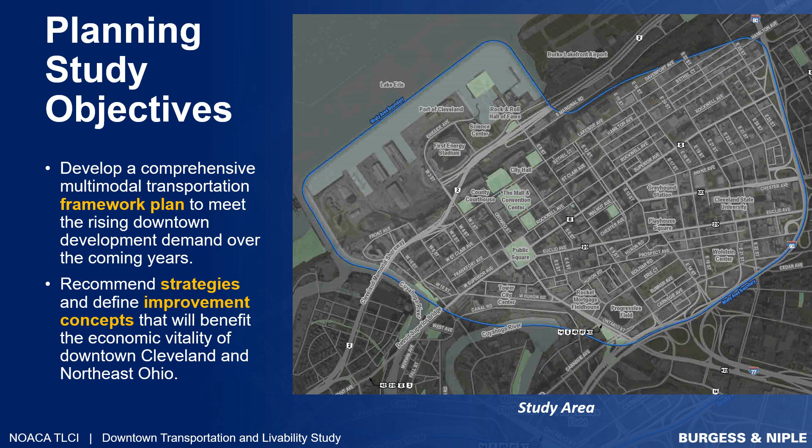This study was sponsored by NOACA, the Northeast Ohio Area-Wide Coordinating Agency, and the study was developed by a consulting team led by Burgess and Niple. A working group helped guide the planning efforts, including staff from the City of Cleveland, the Greater Cleveland Regional Transit Authority, and Downtown Cleveland. The study also included input from a number of key stakeholders and implementation partners, as well as members of the public.

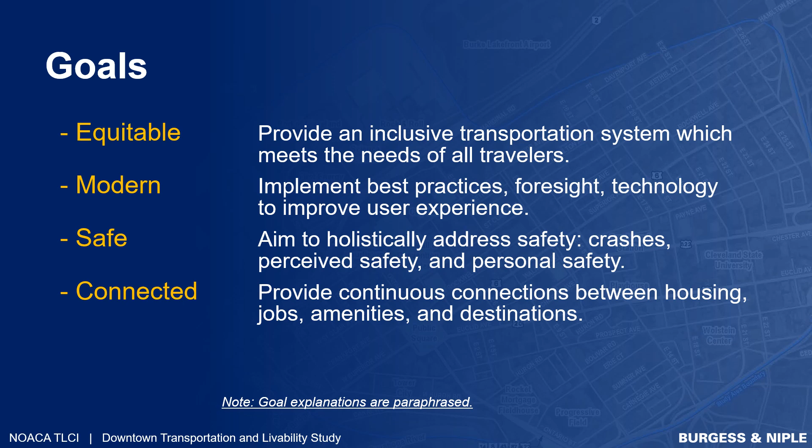When considering where our goals come from, the vision statement says it all. Essentially, descriptors in the vision statement establish the goals for the plan. These goals include equitable, provide an inclusive transportation system which meets the needs of all travelers. Modern, implement best practices, foresight, technology to improve user experience. Safe, aim to holistically address safety, crashes, perceived safety, and personal safety. Connected, provide continuous connections between housing, jobs, amenities, and destinations.

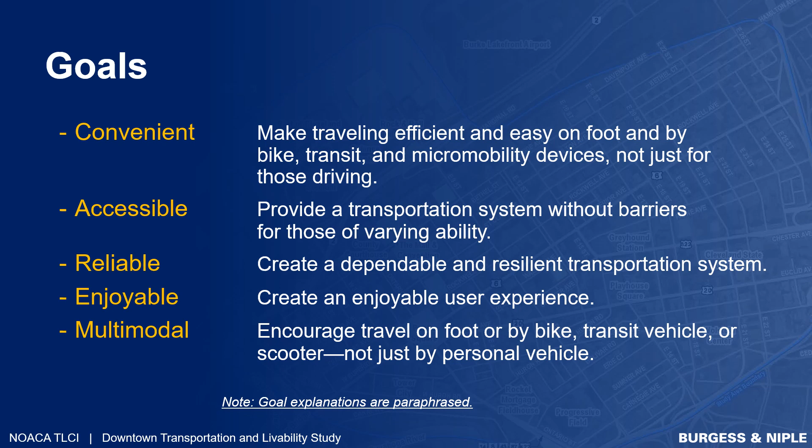Convenient, make traveling efficient and easy on foot and by bike, transit, and micromobility devices, not just for those driving. Accessible, provide a transportation system without barriers for those of varying ability. Reliable, create a dependable and resilient transportation system. Enjoyable, create an enjoyable user experience. Multimodal, encourage travel by foot or by bike, transit vehicle, or scooter, not just by personal vehicles.

Traffic safety is a top priority. Key findings: traffic safety was identified as a top priority for the public engagement survey.

Of particular note includes question number 8, where we asked respondents to rank a number of issues based on their importance. 49% of respondents indicated traffic safety for all users was their most important issue, followed by 23% who indicated it was their second most important issue. The next highest item was providing connected networks for each mode, the first choice of 22% of respondents, and the second choice of another 22% of respondents.

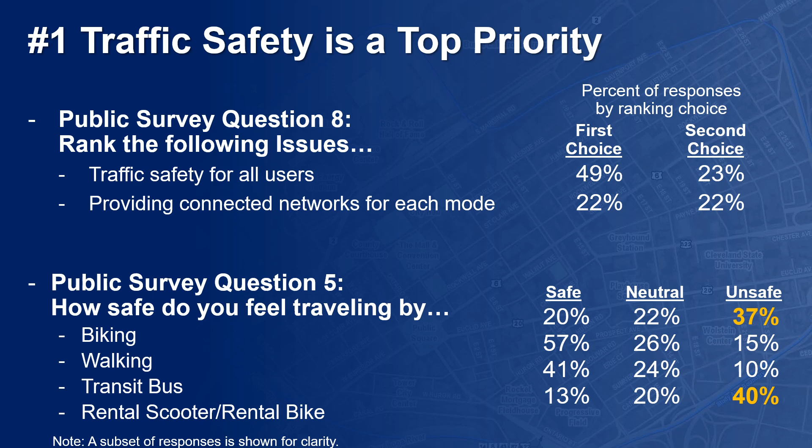As part of the study, an analysis of traffic crashes was performed for the 5-year period 2015 through 2019, pre-COVID. While pedestrian-involved crashes comprised just 2% of all during the 5-year period, they comprised 42% of all fatal crashes and 46% of all serious injury crashes.

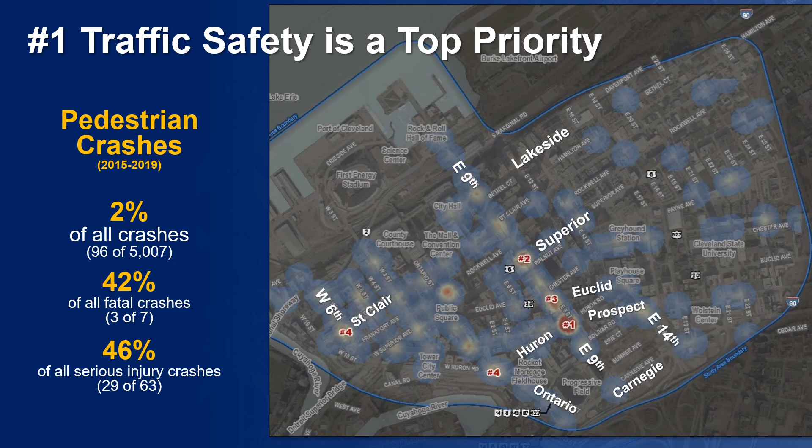The next key finding is that bicyclists face uncomfortable conditions. A region-wide bike level of traffic stress analysis performed by NOACA indicates most streets are only comfortable for confident or expert cyclists, whose studies indicate comprise just 8 to 20% of the population. As such, it's difficult to impossible for interested but concerned cyclists, who comprise an estimated 40 to 70% of the population, to comfortably ride around downtown Cleveland.

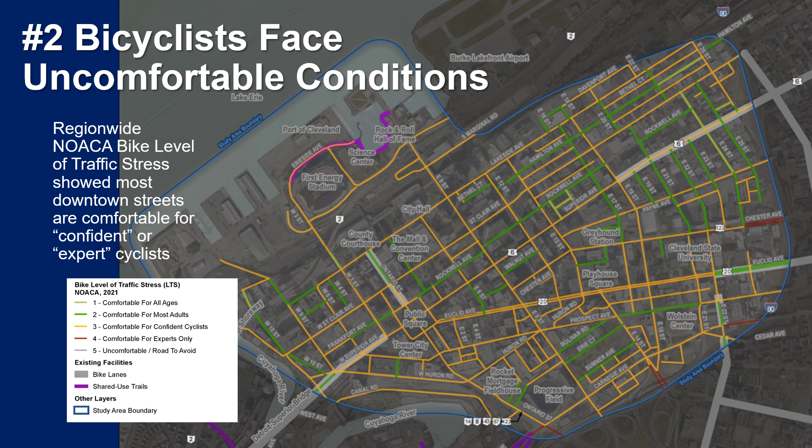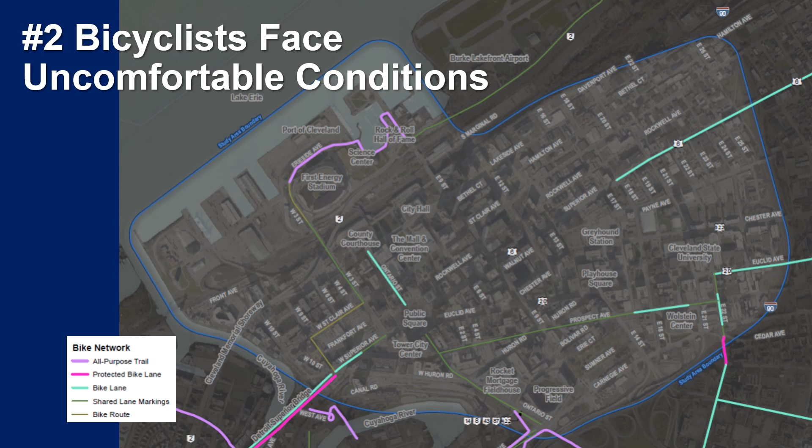Reasons for this include that interested but concerned bicyclists preferred separated space facilities, including all-purpose trails and protected bike lanes. At present, very few facilities of these type are available downtown. However, several projects are in the works to add such facilities.

The third key finding is that user experience enhancements are desired. For the pedestrian mode, some sidewalks and crossings need maintenance and ADA accommodations. In addition, scooter parking on sidewalks was identified as an issue. For the transit mode, transit riders would like more bus shelters, improved maintenance and cleanliness of vehicles and facilities, and more accommodations for bikes on public transit.

Concerning parking, there seem to be limited options to pay for parking at various types of facilities, and also a lack of common signage for public and private providers of publicly available parking. Lastly, wayfinding systems should be more comprehensive and cohesive. There are numerous wayfinding systems downtown, but they're not branded together and don't provide a cohesive experience.

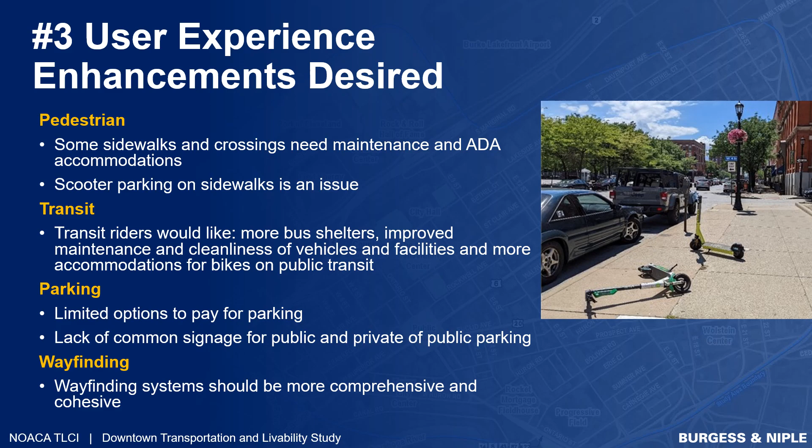The fourth key issue is connections to opportunity are desired.

Specific opportunities include the North Coast, where there's a desire to improve connectivity to and from downtown, the Cuyahoga River, where new access points are desired between the river and West Huron Road and Ontario Street. Neighborhoods: improving connectivity across the Inner Belt, which is a barrier between downtown and east and southeast neighborhoods. And lastly, regional connections: improving bike facility connections between regional facilities and downtown with its amenities.

The fifth key finding: untapped opportunities abound. Based on observation and travel demand model data of pre-COVID travel patterns, many downtown streets appear empty during the business day and after business hours, as they are predominantly designed to quickly move rush hour traffic and special event traffic. This means that streets may be able to have lanes removed to provide space for bike facilities, curb extensions, and other amenities.

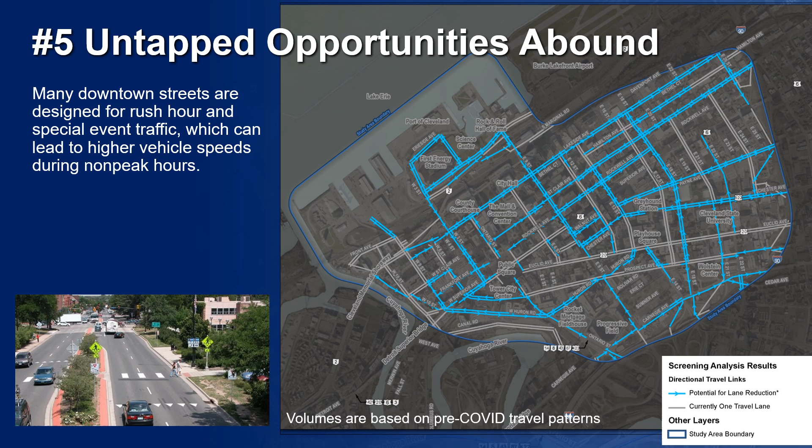Advancing projects. A number of studies and projects are being advanced by project partners. These include the City of Cleveland North Coast Study, for improved connectivity and opportunities for economic development.

City of Cleveland West Superior Bikeway: initial consideration of options for protected bike lanes. Cuyahoga County Detroit Superior Bridge Lower Level Study, to consider options for use of the bridge's lower level.

City of Cleveland and GCRTA Public Square Coordination, as well as Downtown Cleveland's Public Square Mobility Study: interagency discussion centered on improving the user experience.

City of Cleveland Superior Midway: a road diet project to add a two-way protected bike lane within a median.

The Ohio Department of Transportation Innerbelt Reconstruction: a project to reconstruct, widen, and improve safety along I-90, currently awaiting funding. And lastly, the City of Cleveland's Memorial Bridges Loop Trail: a project to connect trails on the Detroit Superior Bridge with the Carnegie Bridge, creating a loop trail between downtown and Ohio City.

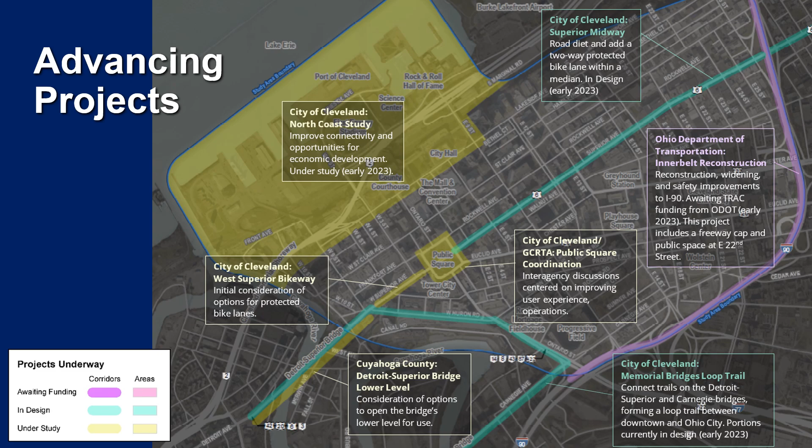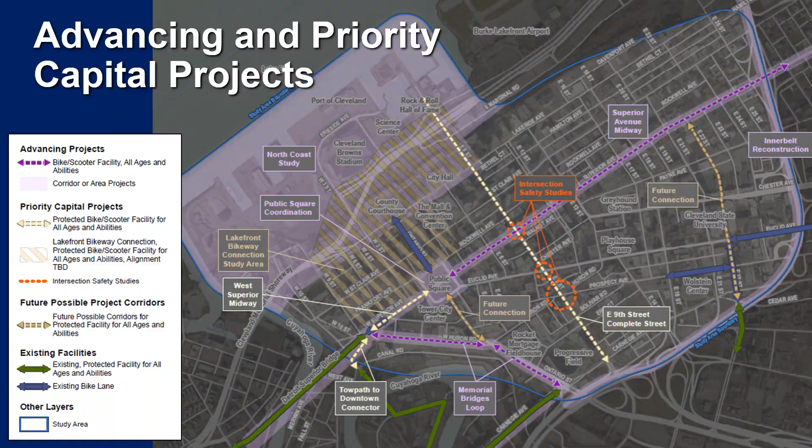Priority Capital Project Recommendations. A number of priority capital projects have been identified by this plan to complement advancing projects by project partners. Ideally, the priority capital projects will be implemented within the next 5 to 10 years. These projects include East 9th Complete Street.

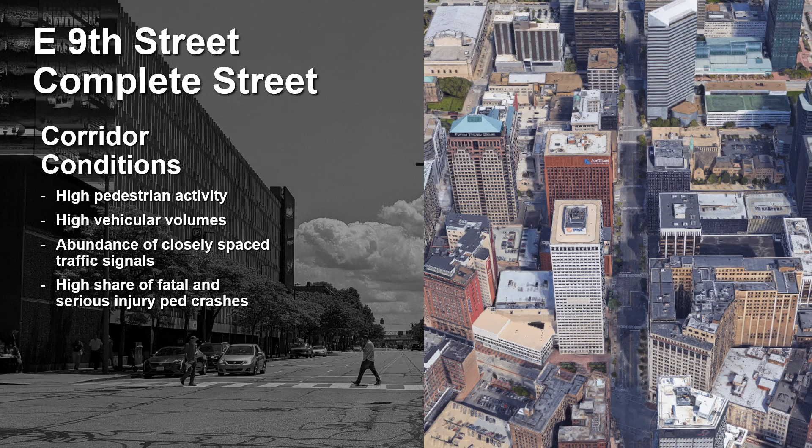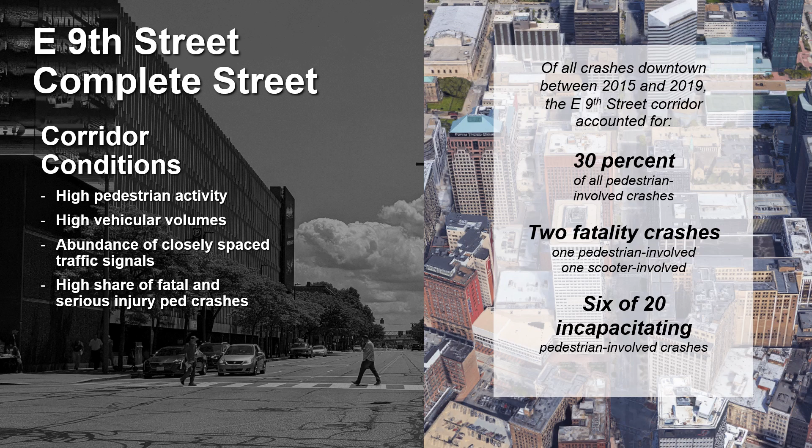Corridor conditions include high pedestrian activity, high vehicular volume, an abundance of closely spaced traffic signals leading to congestion, and a high share of fatal and serious injury pedestrian crashes. During the 5-year period of 2015 through 2019, crashes along the East 9th Street corridor accounted for 30% of all pedestrian-involved crashes downtown. The corridor also included 2 fatality crashes, 1 pedestrian involved and 1 scooter involved, and 6 of the 20 incapacitating pedestrian-involved crashes.

Recommendations may include adding a center median and median refuge crosswalks, adding dedicated space bike facilities where feasible, and evaluating the opportunity to reduce the number of travel lanes and improve traffic progression along sections of the corridor.

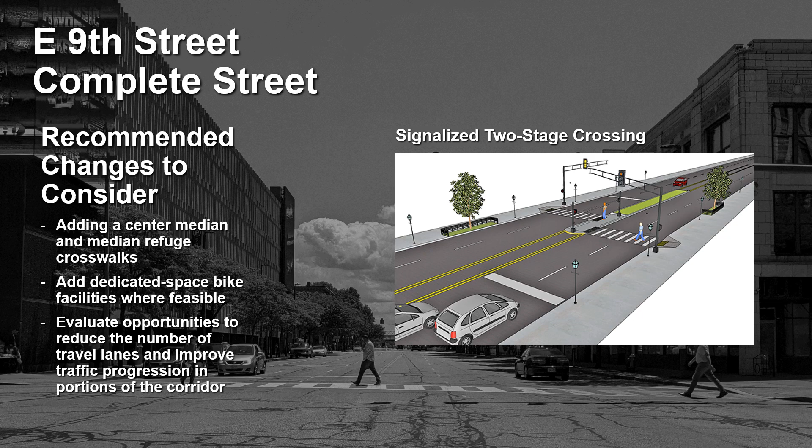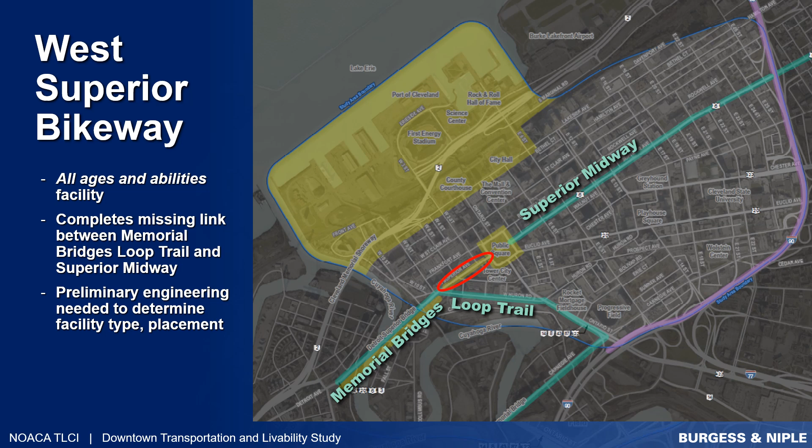West Superior Bikeway: this recommendation includes adding an all ages and abilities facility between Public Square and the intersection of Huron Road, Detroit Avenue, West Superior, and West 9th Street. It completes missing links between the Memorial Bridges Loop Trail and the Superior Midway. Preliminary engineering is needed to determine the exact type of facility and where it will be placed within the roadway environment.

Lakefront Bikeway Connection: connecting the Lakefront Bikeway from the Detroit Superior Bridge to a future extension within the North Coast Redevelopment Project. The alignment for this all ages and ability connection will be refined as part of the city's mobility plan.

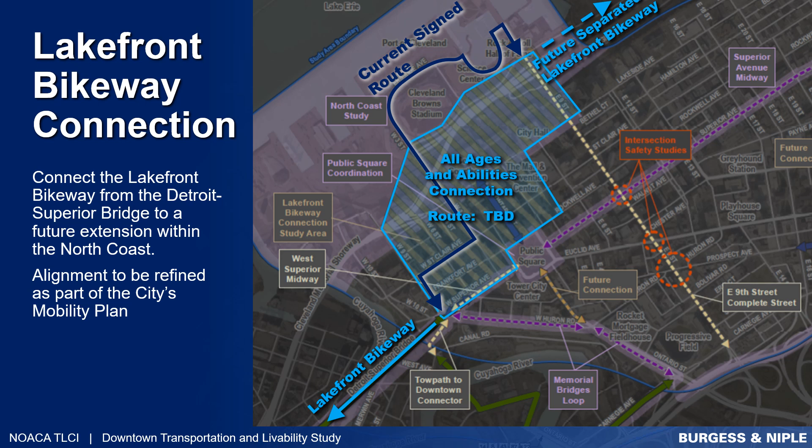Towpath to Downtown Connection: provide a comfortable and direct connection between the Towpath Trail, Lakefront Bikeway, and Memorial Bridges Loop Trail.

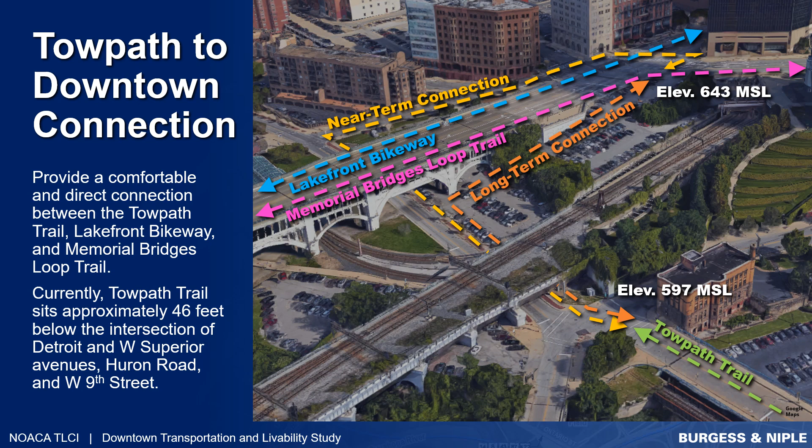Intersection safety improvements: a subsequent study is recommended to evaluate crash trends at 3 intersections with East 9th Street, including Prospect, Euclid, and Superior.

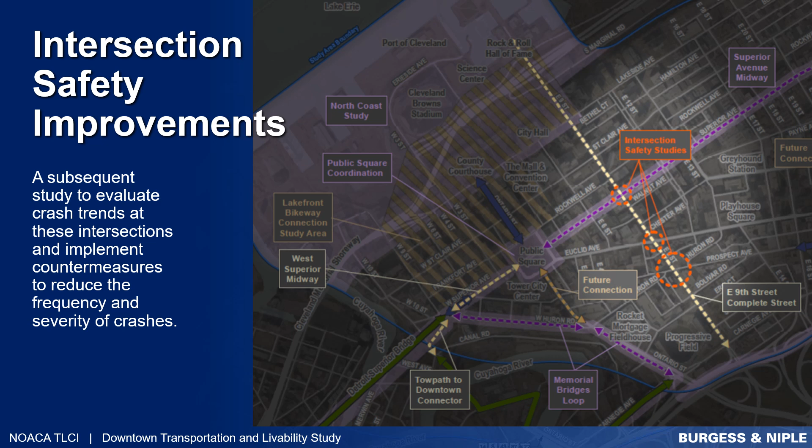Downtown transit transfer improvements: ensure transit accommodations fit within the street environment and are safe, beautiful, and function well for those who use them. Beyond bus stops, improve route reliability during special event street closures, and, where possible, improve connections to Tower City Station. A subsequent study is needed to determine the capital improvements needed to support this recommendation.

Program and policy recommendations. Programs to address systemic issues.

The Downtown Circulation Study: travel patterns have and will continue to change due to COVID, the North Coast, Superior Midway, and Innerbelt projects. This study will model how travel patterns will change and can be changed to allow for road diets and the addition of more on-road bike facilities.

Street Transformation Program: this program will decide what streets will look like, how improvements are financed, and improved attention to maintenance and aesthetics. Then the program will start implementing changes to transform downtown streets.

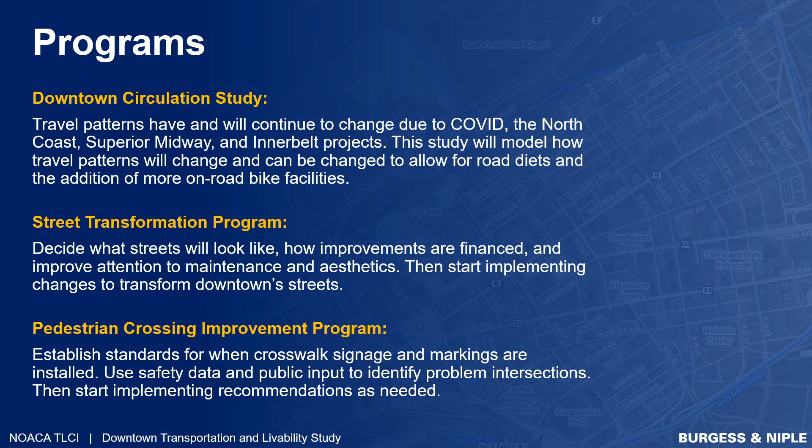Pedestrian Crossing Improvement Program: this program will establish standards for when crosswalk signage and markings are installed, and use safety data and public input to identify problem intersections, then start implementing recommendations as needed.

Policies: improved regulation of curb lanes and sidewalks. Develop regulations for sidewalks and curb usage, including accessibility, improved bike and scooter parking, and managing delivery zones.

Modernizing parking payment methods and wayfinding. Continue with efforts to modernize parking payment methods and improve parking wayfinding signage.

Review downtown transit services: improve coordination with regional transit services. Wayfinding and how to downtown: create a wayfinding plan to develop consistent wayfinding branding across travel modes and to connect points of interest.

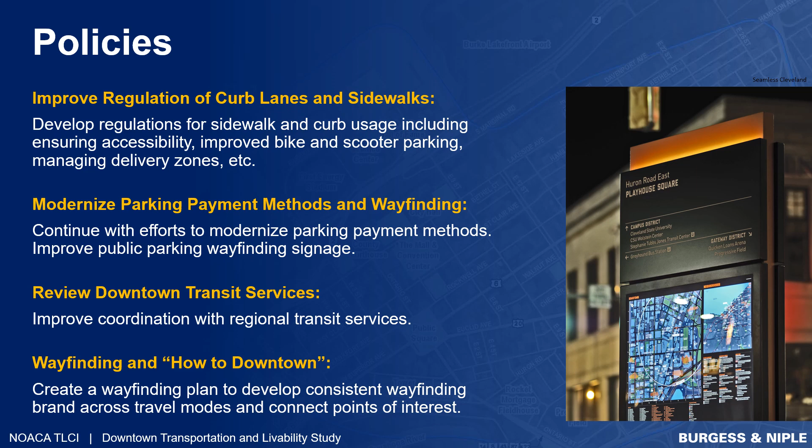Implementation. As noted earlier, the Downtown Transportation and Livability Study is a framework plan. That is, its implementation relies upon other agencies. This plan establishes a baseline understanding and vision and charts a course forward.

Plan partners are responsible to advance recommendations, though NOACA may provide funding for capital projects. The timeline for priority capital projects is 3 to 4 years at minimum, as most of these recommendations need to be programmed into capital budgets, studied, designed, and then implemented.

This concludes our presentation of NOACA's Downtown Transportation and Livability Study. For more information about the planning process and how recommendations were determined, view the planning document at noaca.org.